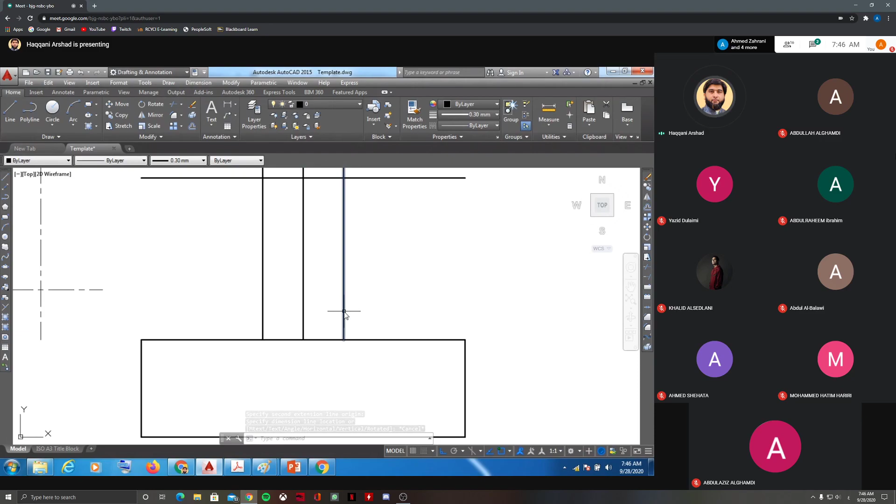So I will offset 10 from here on the right and here. Similarly, this one is on the left. Sorry, so this is actually a midpoint. I'll just remove it. So it will be like this. So I'm just going to connect this. This is construction, just simple construction using the dimensions.

So I'm just going to trim the lines. Okay, and also I'm going to trim like this. So it will be the L. Okay. Also you can remove this one. See this, something like this. So you have L's on both. So you got L. So this is 100.

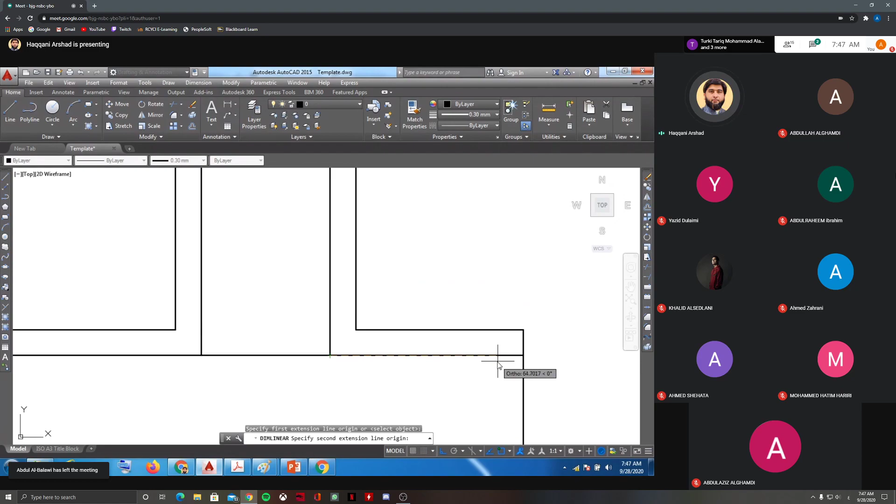If you want to check the dimension from here to here, it must be 100. Okay, and if you see, this distance will be 50 in between. Okay, and this is 75 from here to here, and the thickness from here to here is 10.

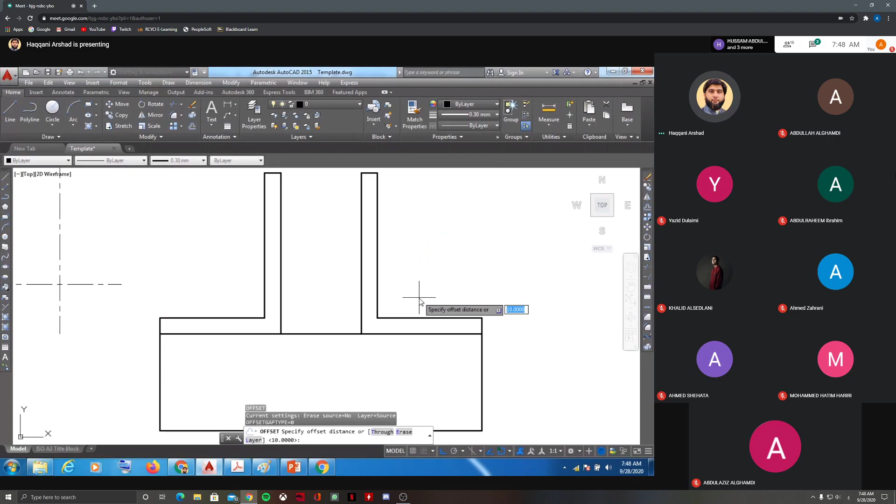Okay. Now I'm going to draw the bush here in the middle. This is the bush. That is the distance given here. If you see from here to here, it is 65 to get the center, and from the center we can take 32 up and down in order to get the bush. So I'll offset 65 from here. This is my center line, where I'm going to fix the stud. So this is my center line.

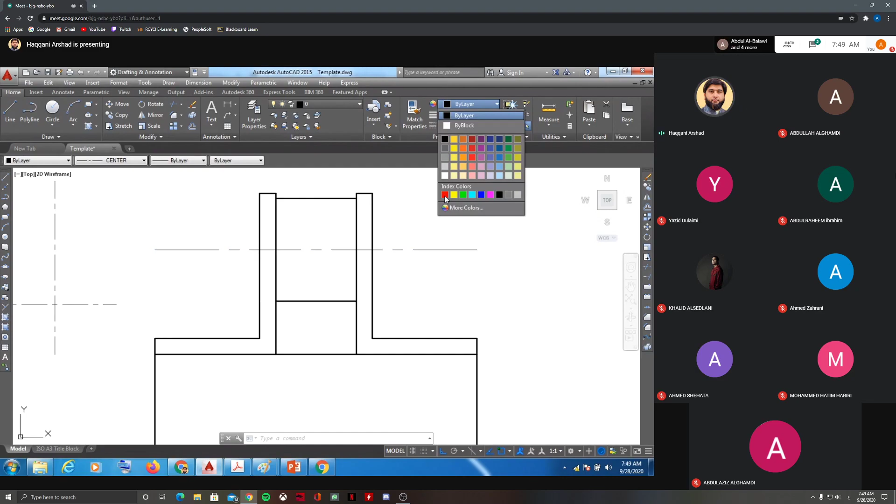Then I'm going to use 32. That is the dimension for the bush. So this will be my bush. Use color. Okay. Then I can trim these lines. You can see the figure and draw. You can just trim the lines so you can show that this is the bush. So this is actually a center line. I'll use some color for that. Okay, this is the center line for the stud.

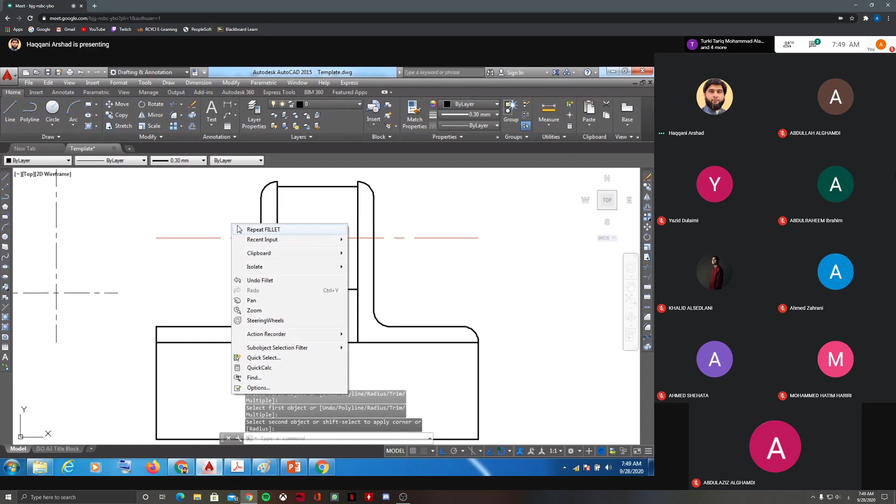Now we have to do the fillet, because if you see, there is a fillet radius R10. R10 is the radius. You know how to do the fillet; we already did it in MCET201. Go for fillet. R, you have to type R always. Enter. Then the radius is 10. So you can do the fillet. Repeat for all 3 edges of the L plates. Okay. Now we have done the fillets.

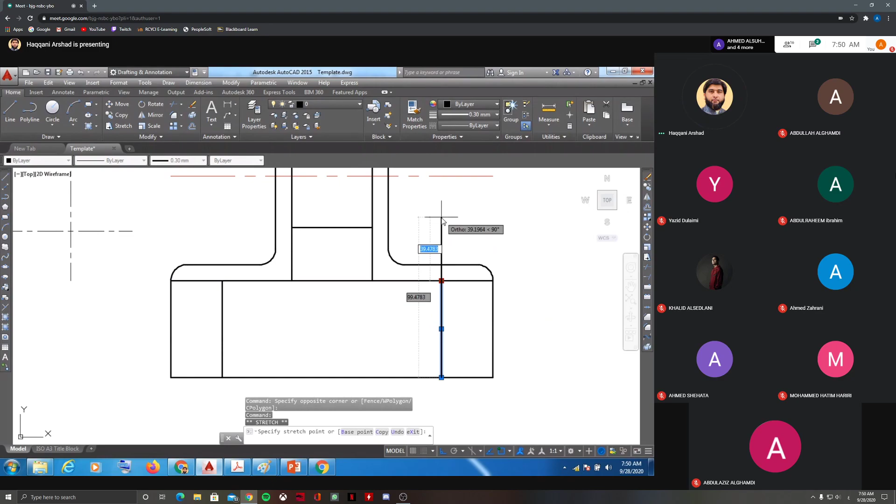Now we are going to take the center line for the cap screw as well. You can see the same distance. 32 is given on both sides, so we'll take 32 as well. You can offset 32 from here. 32 is also 32. Okay. This will be my center line for the cap screw. So I'm going to change it to a center line.

Okay. Now this will actually be a blind hole. It's not a through hole. Right. Okay. Now first we'll start with the stud. I'll show you the stud first.

M16 stud. Now, as I told you before, whenever we start any drawing, the size will be given, like M10, M20, M14, whatever. It means the capital D, that is the major diameter, will be given. So M16 is the size for the stud, and M14 is the size for the cap screw. We have two different sizes here. So capital D is 16 for the stud, and capital D is 14 for the cap screw.

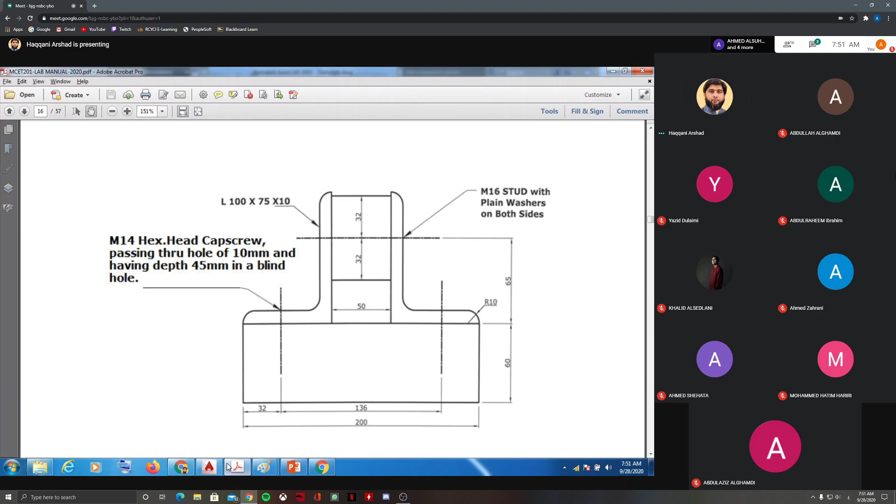So let us start with the cap screw. You need to calculate the dimensions using the formulas. Last week we used some formulas. If you go back to exercise 2.3: the width 1.5D to draw the hexagon, 2/3D, 7/8D, small d, that is 0.85D. The formulas will be constant.

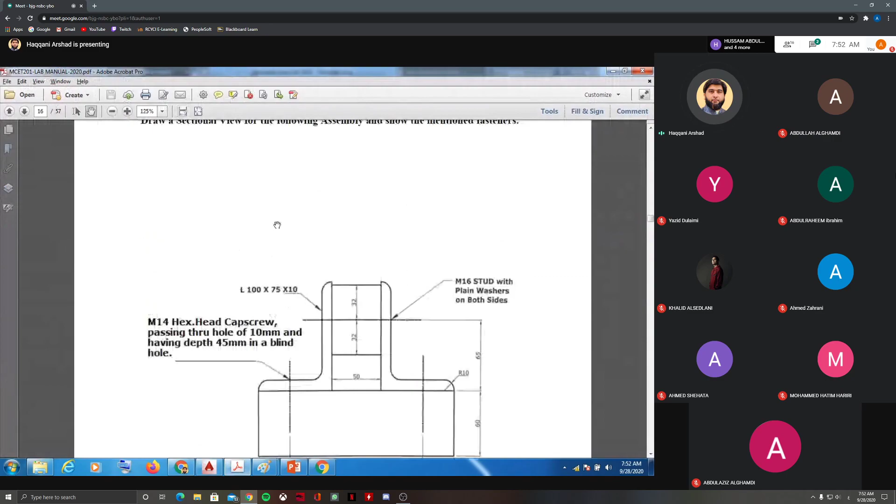Okay. Now remember one thing. Whenever we start any threaded fastener, whether it is a cap screw, a stud or a bolt and nut, we always start with the hexagon. This is actually the width, that is 1.5D. Whenever you want to draw a bolt and nut, a stud or a cap screw, you must start with the hexagon. And the rule for the hexagon is the same. If you go back to exercise 2.3, you see the rule 1.5D.

If you are drawing the bolt, the rule will be the same, and if you are using a nut, the rule will be 7/8 D. So you must remember these rules. Using these rules only, you are going to calculate and draw the dimensions, because only the capital D will be given. The other things you need to remember and calculate accordingly.

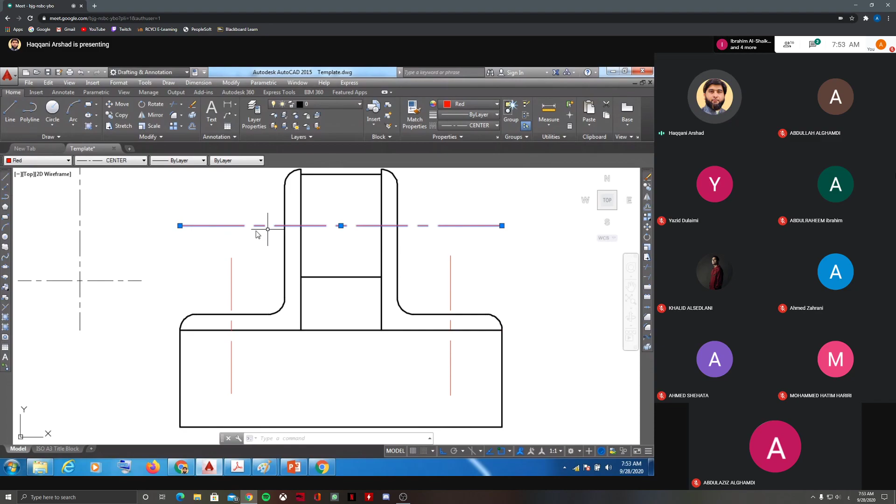Now I'm going to draw a stud here. I'm going to draw the hexagon first, then I will be able to project the lines to draw the nut. Here I'm going to use nuts because this is a stud, so I can only use a nut on both sides, one on the left and one on the right. It will be something similar to this one. If you go back to exercise 2.3, you see this one. This is threaded on one side. You have a nut. It will be similar to this, but it will be a mirror image.

So I'll start with the hexagon first. Let me just take one more line here. This is also my center line. I'm going to draw the hexagon. Same rule, number of sides 6. I'll start the center here. Now you know inscribed and circumscribed. We usually go for C, that is circumscribed. I have already shown you last week. Now you need to calculate first. It's asking me the radius, so use a calculator.

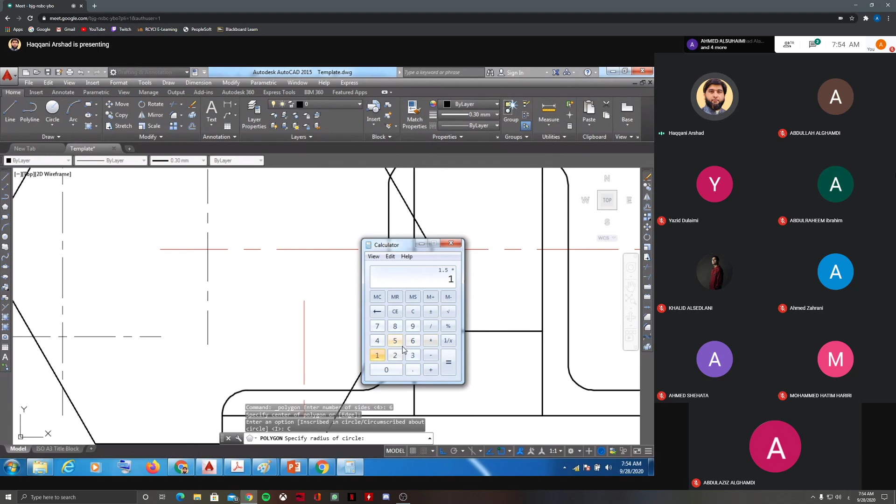Now what is the rule? The same rule, 1.5 D. The D here is 16. Remember, capital D is 16 for the stud. So wherever you are using capital D, it will be 16. So multiply by 16, it will be 24. So 24 is my width, but here it is asking me to specify the radius. I told you that whenever you use a radius, you must give half of the width. Don't give 24. 24 is the width, so you must give half of 24, that is 12.

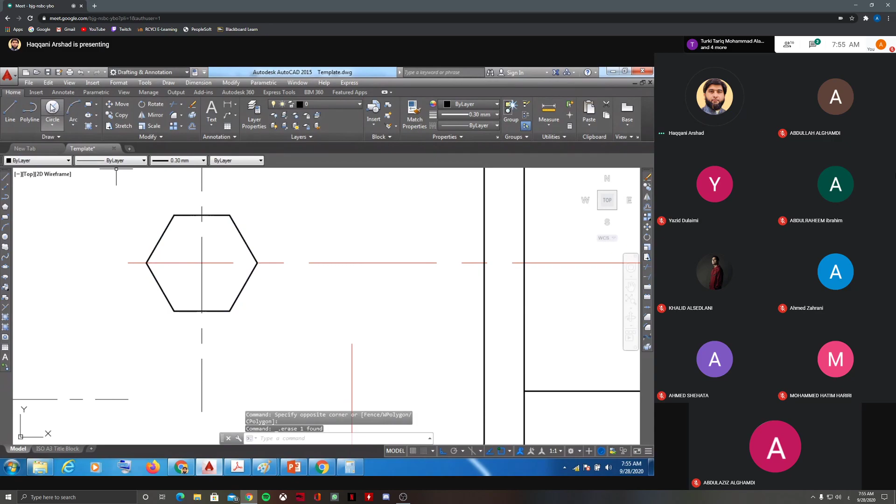If you have any doubt, you have an option to check the dimension. From here to here, it must be 24. This is according to the rule 1.5D: 1.5 multiplied by 16, that is 24. This is not the first time I'm drawing this; we did it in exercise 2.3. After that, you can draw the same circle using the same radius, 12.

But now, one thing is a change here. I'm not going to draw the stud vertically, because if you see the position of the stud, it is horizontal. So we need to rotate this, because you are fixing it horizontally. When you draw this hexagon, usually we project the lines like this, just like in exercise 2.3, to draw the bolt and nut. But we are not going to draw vertically, we are going to draw horizontally. So you must rotate this hexagon in order to project the lines horizontally.

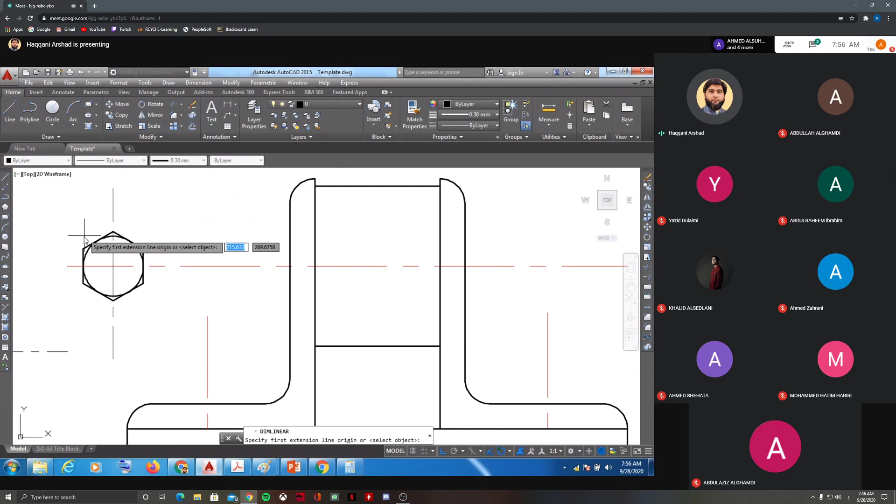So I'm going to rotate this one. Go for rotate from the center. Just type 90, so it will be rotated. When you check this dimension, this will be 24, that is the width of the hexagon. Now I will be able to project the lines. Simply I'll project the lines onto this body, because I'm going to project the 4 lines. Same. Okay.

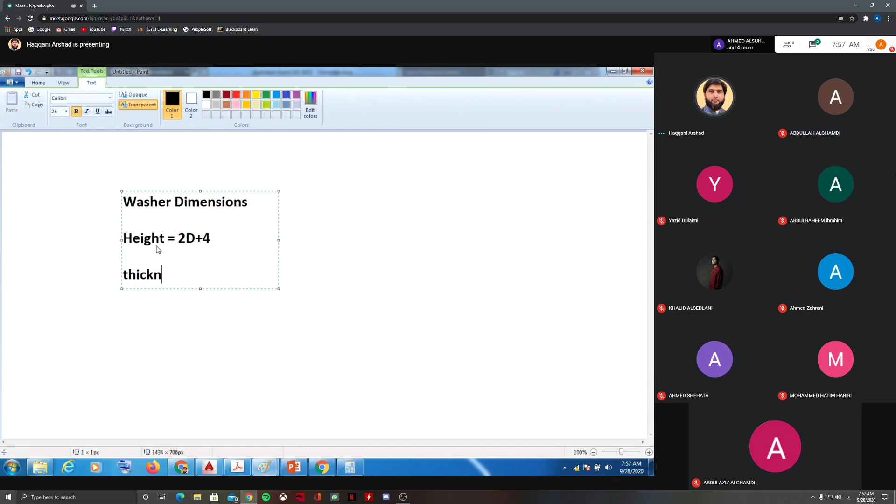Now I can fix the nut here. But before I fix the nut, as per the question, they asked us to fix the washer. I'll fix the washer and then I'll fix the nut. Now remember the washer dimensions I will give you. Just make a note of the washer dimensions. The total distance, or you can say the height, is 2D plus 4, and the thickness will be 0.15D.

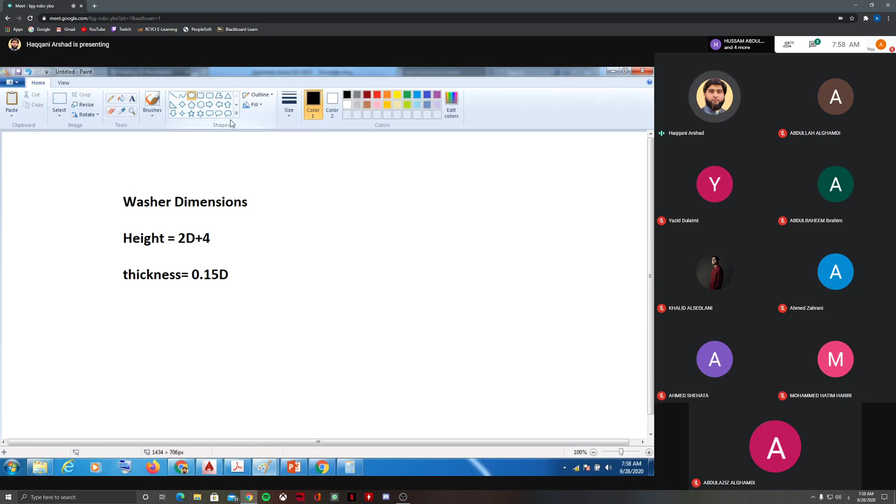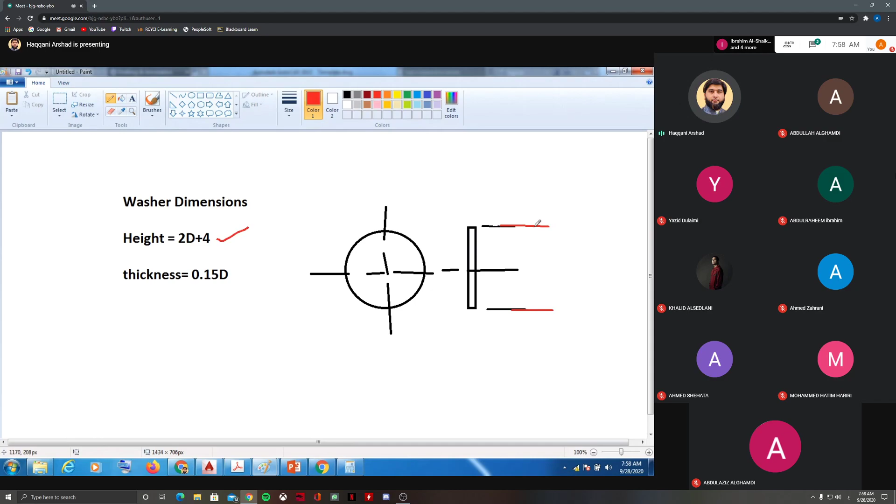For example, if you have a washer like this, if you see the side view of the washer, it will be something like this. Now let us say this is a center line. Here the dimension from here to here is 2D plus 4, the height. The total length of the washer will be 2D plus 4. D, you know, is the given D, that is the major diameter.

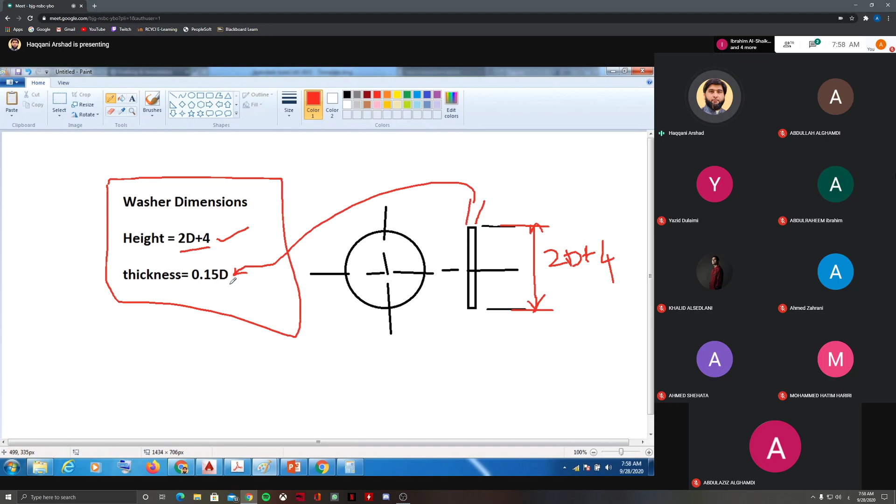And this is the thickness. The thickness will be 0.15D. So you have to make this note as well, that for the washer 2D plus 4 will be the height, and 0.15D will be the thickness. I can fix the nut here, but before the nut, I need to fix the washer to the L angle, then I will fix the nut. So I will take the dimensions for the washer first.

So what is the thickness? It is 0.15D. So I'll take the thickness first: 0.15 multiplied by D, which is 16, gives 2.4. So I can offset 2.4 from here. So I've got the thickness, and I need the length as well. What is the length formula? That is 2D plus 4: 2 multiplied by 16 plus 4, that is 36. 36 means I can offset 18 from the center. Then simply trim these lines.

Right, now you can clean this area.

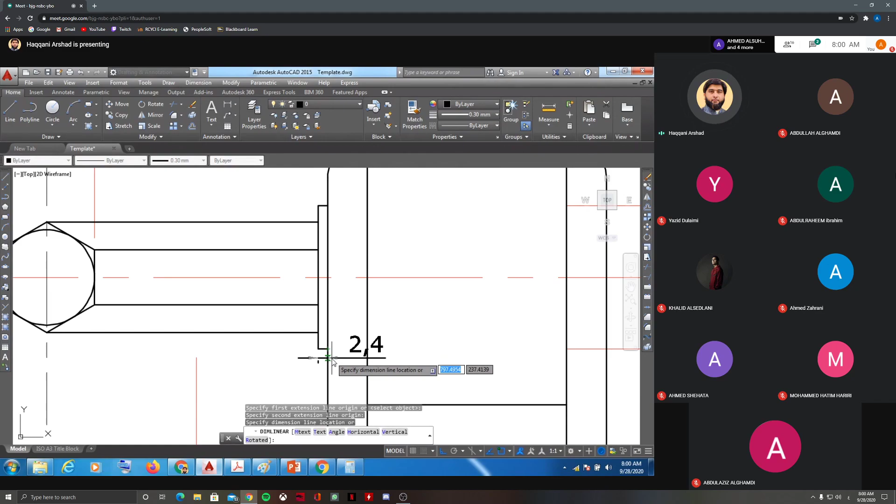Now above this washer, I am going to fix the nut. What is the formula for nut? As per the previous exercise, you see the thickness of the washer is 7 by 8d. If you go to the exercise, you see here, this thickness of the washer, 7 by 8D.

So sorry, the nut, the thickness of the nut is 7 by 8D. So we are going to use the same thing. 7 by 8D, use the same formula, 7 by 8 multiply the D is 16. 14 is my thickness of the nut.

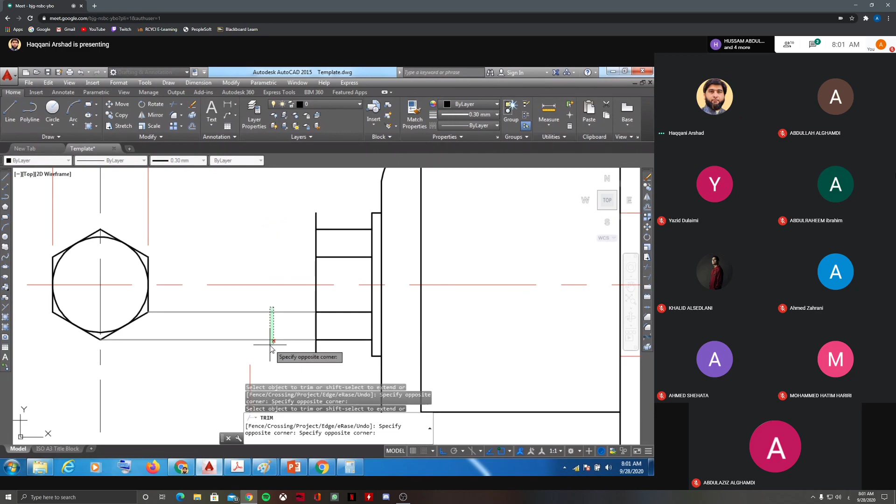So I will offset 14 from here outside, above the washer. Not from here, already you have the washer here, so you must offset from here. So you have this thickness you got for the nut.

Now always whenever you say nut, it will be something like this. Always remember, whenever you say nut, this one, it will be something. Because when you fix a nut, there will be a nut end. Always there will be a nut end. So it will be similar to that.

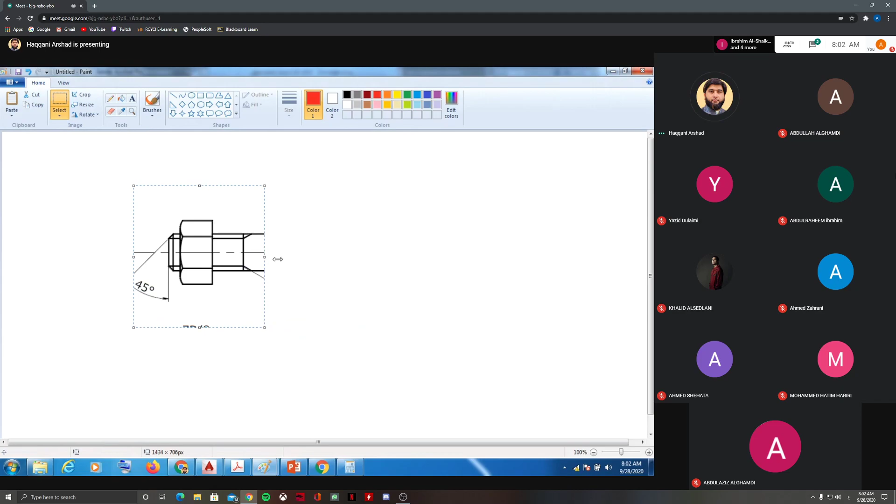I'll just show you an example. Yeah, something like this, it will be similar to this one. So whenever you fix a nut, there is a nut end to this. Then only it will be the representation of the nut.

So now the next thing is to draw the arcs. As you know, whenever you draw a bolt or a nut or a cap screw, you must have the arcs. So we are using the same method as in 2.3. I have shown you how you're going to use it. So from the end of the circle, not from the end of the hexagon, from the end of the circle, we are going to project a line.

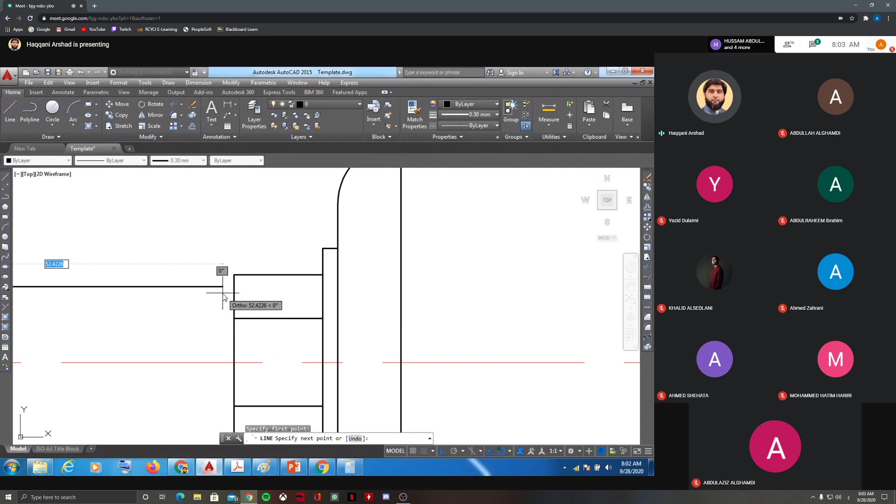Same, wherever it is touching the head, we are going to take a 30 degree angle. Means this angle, this should be 30 degrees. So it should be how much? It should be 60, if I say 60, this will be 30.

If you go back to the previous exercise, see, I'm using the same method. It should be 30 degrees. Later on, you can mirror it on the other hand, then you can connect this second line. And then you're going to use a 3-point arc.

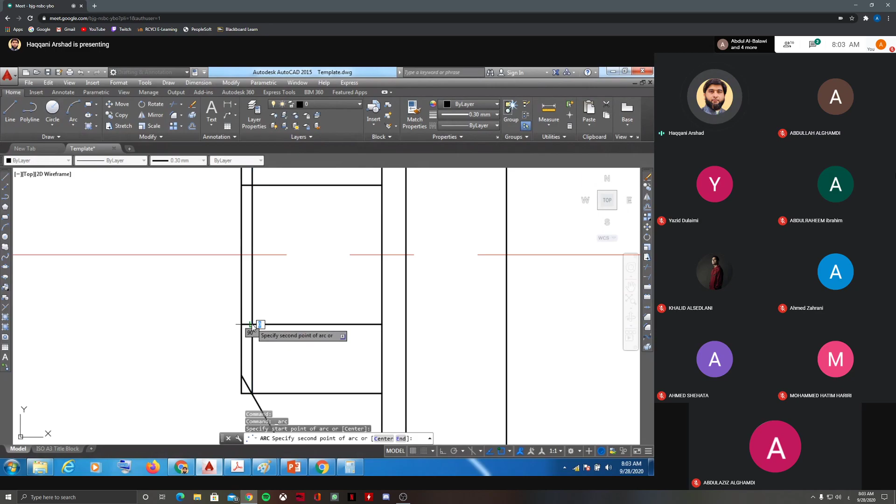Same method, it's not a new method I'm doing. We have done this in exercise 2.3. Similarly, we are going to use on the left and right the same arcs.

Use 3-point arc from here, take the midpoint. Also here. After that, you can just simply remove this line and then trim the edges.

Now you got the arcs, but this nut is not complete without the end. So it must have an end like this. As I told you, we usually offset 5 to draw this nut end.

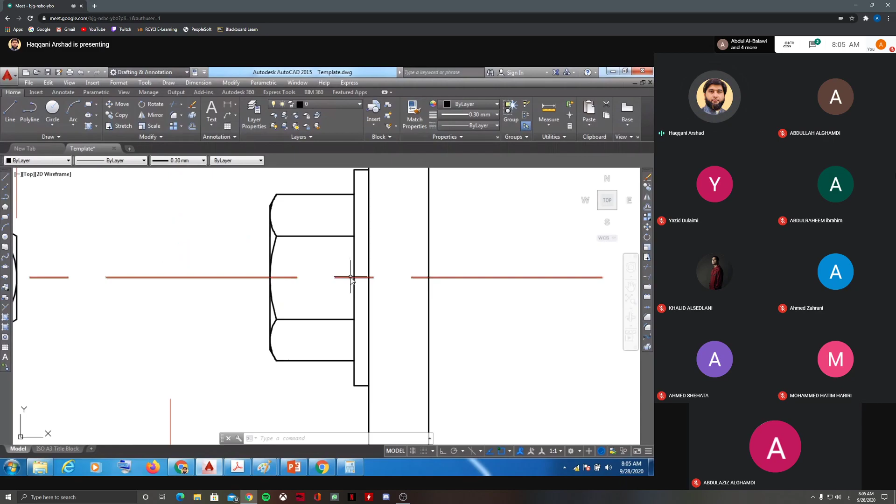But in order to draw this, you must have the capital D and as well as the small d. So now we are going to take the capital D and small d with the angles, the same method. Let me just take offset 5 from the nut end.

Now I'll take capital D, small d from the center. The D is 16, small d has the formula, that is 0.85 D. So D is 16, so you can offset 8 up and down. This will be capital D, that is the major diameter.

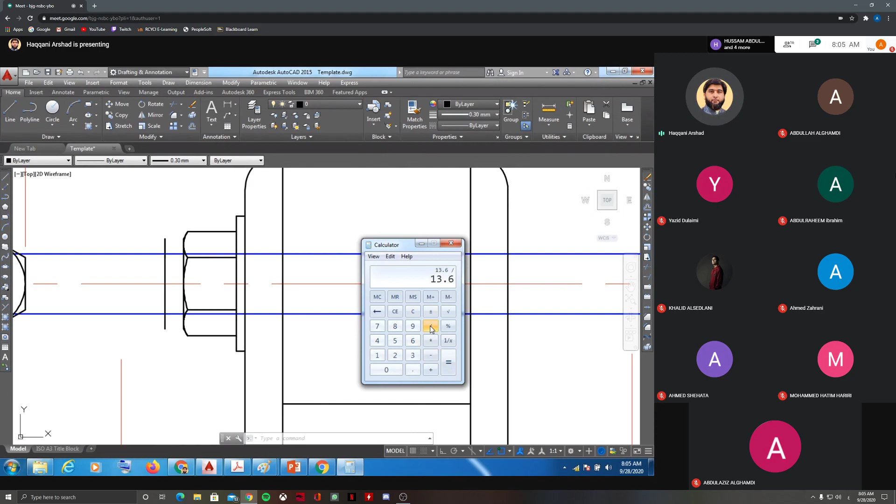Then I will take the small d as well. What is the formula for small d? 0.85 multiply D, 16, that is 13.6. 13.6 means I can offset 6.8 from the center.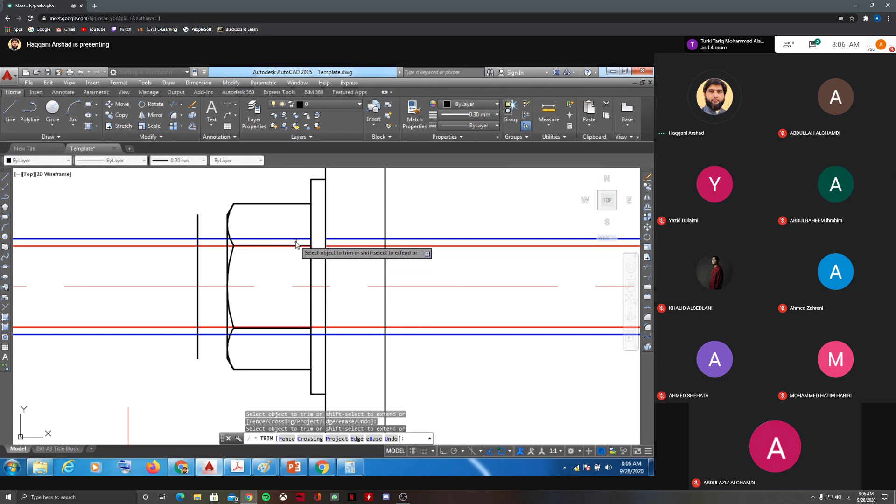Now I have this capital D and small d. And as I told you before, whenever you have this capital D and small d, it should not come inside the bolt, it should not come inside the nut. So we are going to clean up, you just need to trim it. Like you see, it's coming inside the washer, it's coming inside the bolt, so I'll just trim the lines.

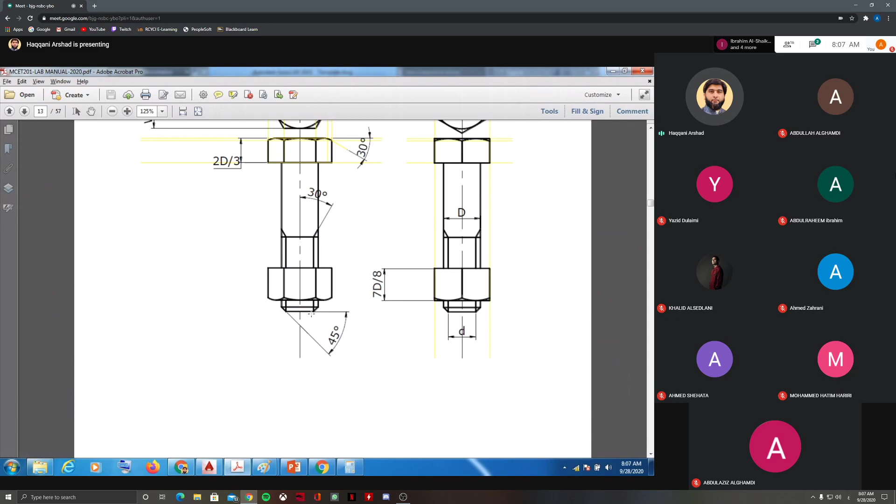Okay, now the final thing is the angles. As I told you, one side will be 45 degrees, the other side will be thread run out, that is thread 30 degrees with the center line. Like here, see one side 45 degrees and other side thread run out using capital D and small d. So we are going to draw the angles. You see this one.

Using small d, take 45 degrees angle, joining the capital D and small d. Same thing, I can project it. You can mirror the same thing on the other side and trim it. Like this, so you got the 45 degrees chamfer, the same thing.

And the other side will do thread run out. Thread run out means this angle with the center line. Always it should be linked with the center line. It is linked reference to the center line. It should be 30 degrees. So I directly will take 30.

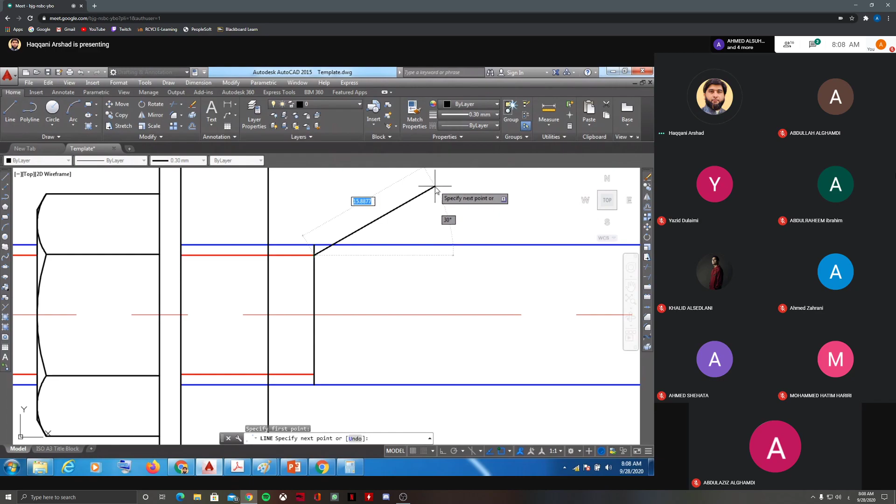You can see if you want to see the dimension. This line with the center line, it must be 30 degrees. So I can just mirror it on the other side.

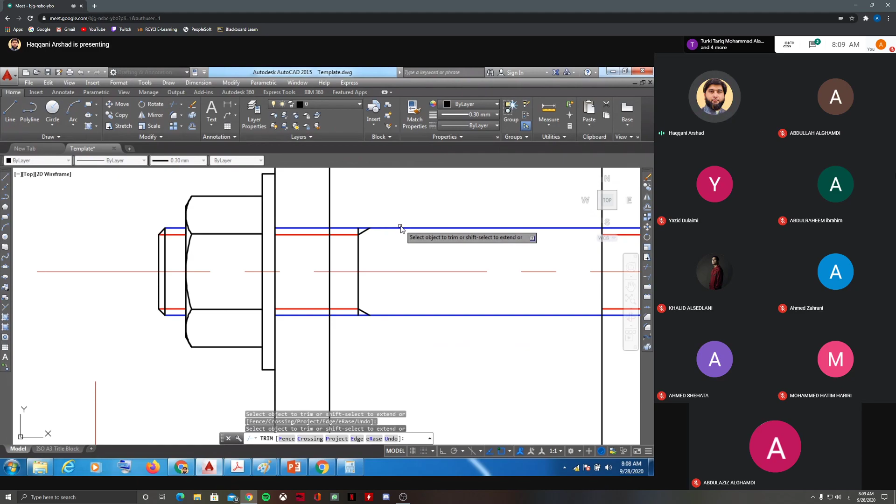So your nut is ready with the washer. The only thing here, there is one problem here. Whenever, because this is a sectional view, we are going to show in a section view, this line is actually the line joining this part and this part. So this line, which is the joining line for these two parts, the partition line, should not come inside the hole. Means in sectional view, the hole should be clean.

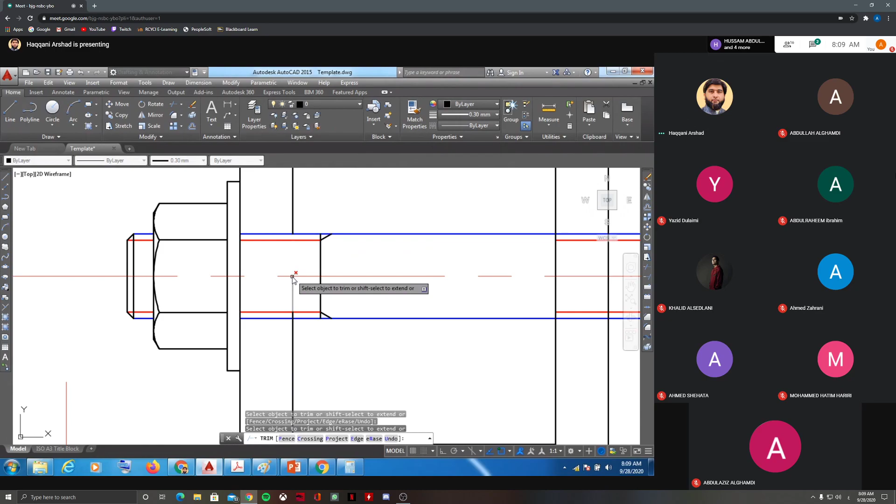Only you must have a capital D and small d. You should not have any other lines. So this is coming inside. So it is really important to trim this line. See, I'm going to trim this because it is coming inside the hole. So always remember, it should be like this.

The other side will be same because as I told you, stud is threaded on both sides. You have threads on both sides. So you're going to use another nut on the right side. So no need to draw because you're going to draw the same washer and nut on the other side, on the right side. So what I will do is simply I will mirror it because I have the same thing on the other side. So I'll simply remove all these lines.

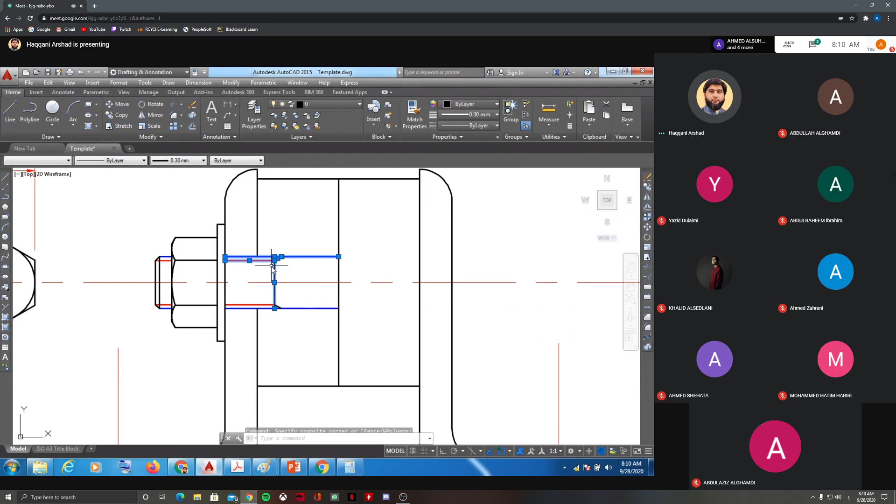You can save your time. Simply you can save your time. So what you do, simply select everything, the capital D, small d, select the nut, select the washer, okay, copy, make sure that every line, every angle, the arc is selected, and you can simply mirror it on the other side. Okay, because it's an opposite side, so you need to mirror, you cannot copy.

See, that's it. And this line which is coming inside the hole, I need to trim this. See, you got the stud because stud is threaded on both sides. It will be a mirror image, it will be same on both sides. So because it's a through hole, so you will have two nuts, one on the left and one on the right. I hope you understood this construction of a stud, washer, joining these three parts.

Okay, after that we'll do the hatch, but we'll not do hatching now. We'll finish the cap screw and then at the end we do the hatch. Okay, now let us come to the cap screw. Now here we are going to draw the cap screw.

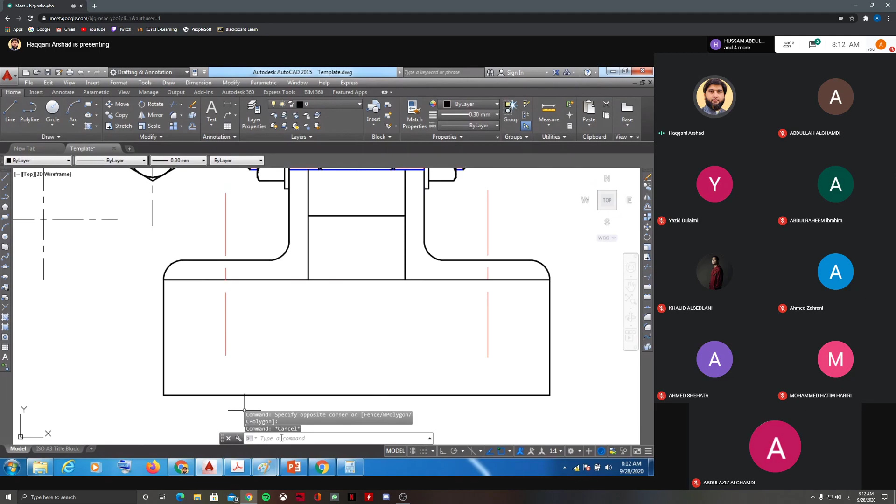Now I'm going to draw the cap screw here. Same, I will start with the hexagon here. But if you see this, the cap screw is vertical, not horizontal. So we are going to draw the hexagon, and then we are going to draw the construction of the cap screw in a blind hole. Okay, but here there is slightly a difference. If you see a cap screw, I'll just show you the construction of a cap screw. No, I'll just take this. Okay.

The construction of the cap screw. We are going to draw with the hexagon, starting with the hexagon as usual, using the same formula, 1.5D. We are going to project it, and then we are going to draw.

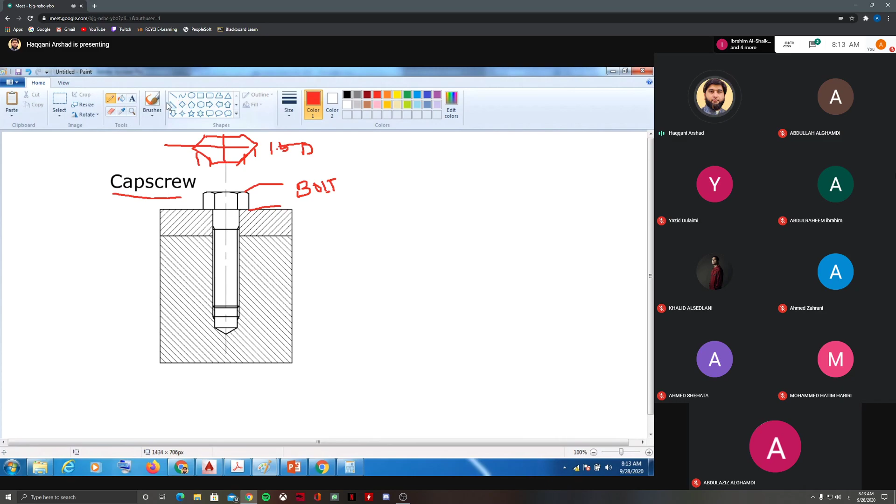This thickness, the head of the cap screw, will be similar to bolt, because I told you cap screw is also called bolt. So we are going to use the same dimension, the same thickness for the bolt. What is the thickness of the bolt? 2 by 3D. I hope you remember from last week. We are going to use the same method, 2 divided by 3 multiplied by the given D, for cap screw, because cap screw is similar to bolt.

But nut is 7 by 8D. Don't get confused between bolt and nut. Nut is 7 by 8D. That is a different thing.

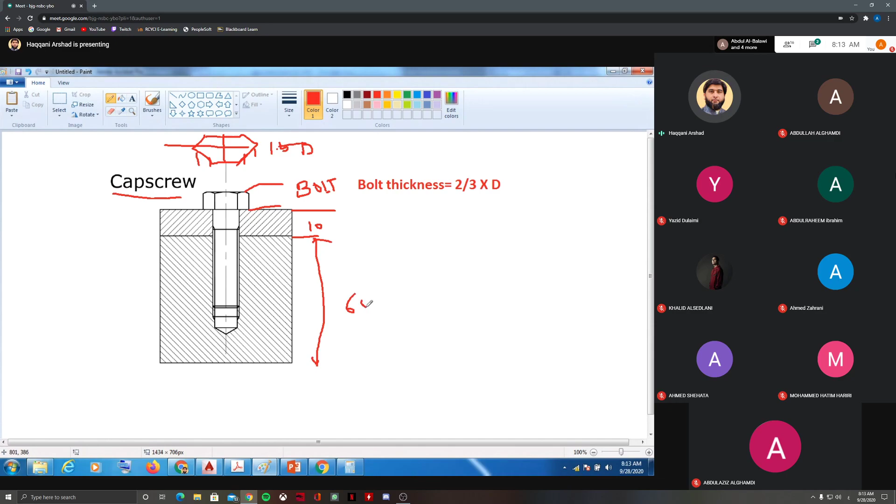Now from the figure, this is 10, and this is 60 from here to here, which is the base actually. From the figure, I'm just showing you an example. Now the depth is given in the figure, that is 45. So we are going to take the depth from here to here, which is given in the question. They say 45 is the depth.

Now here we have two more angles added. One angle is the drill angle - if you see the V, something like this is called drill angle. Then we have a tapping angle, and then this is actually the 45 degrees for the cap screw itself, and this is the thread run out.

So only these two angles are new. Already you know this is a thread angle, thread run out, that is 30 degrees with the central line. This is 45 degrees angle - you already know that whenever you have end of the threads, you have 45 degrees. Only this angle, the tapping angle, is added here.

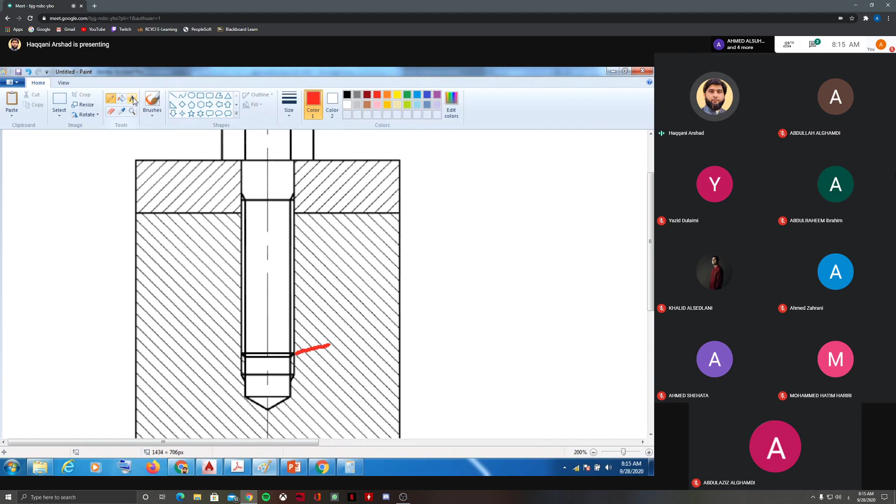So let me just go back and zoom in. Now, as I was telling, only this is the angle, that is 45 degrees, common.

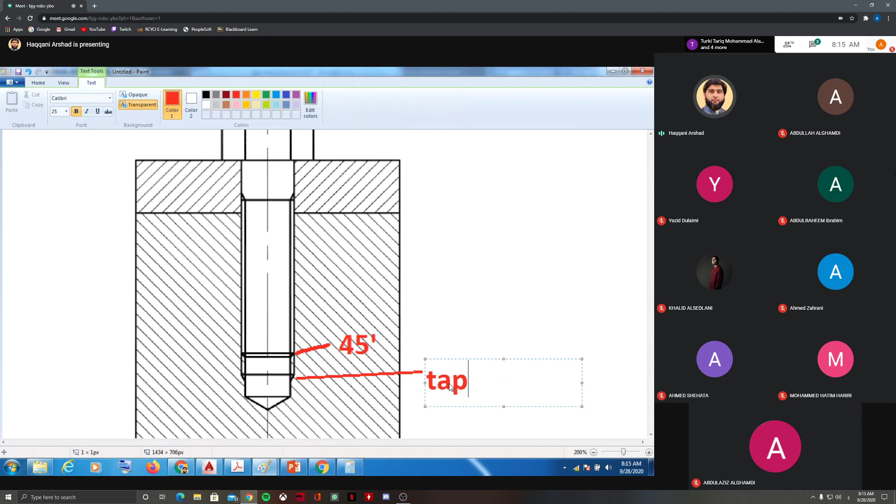We have one more angle, this one, which we call tapping, or you can say this is for the threads actually. It's similar to thread run out. This angle with the center line will be 30 degrees, thread run out.

The last one is the drill angle. When you take the depth and make the drill, this will be 120 degrees included angle, the angle included in the V will be 120 degrees. Means something like this - say this is the V. So this angle should be 120 degrees included angle.

So only two angles are added here: 30 degrees with the center line, the thread run out or tapping angle, and the drill angle. The remaining - this is 45 degrees for the cap screw, and this is thread run out for the cap screw.

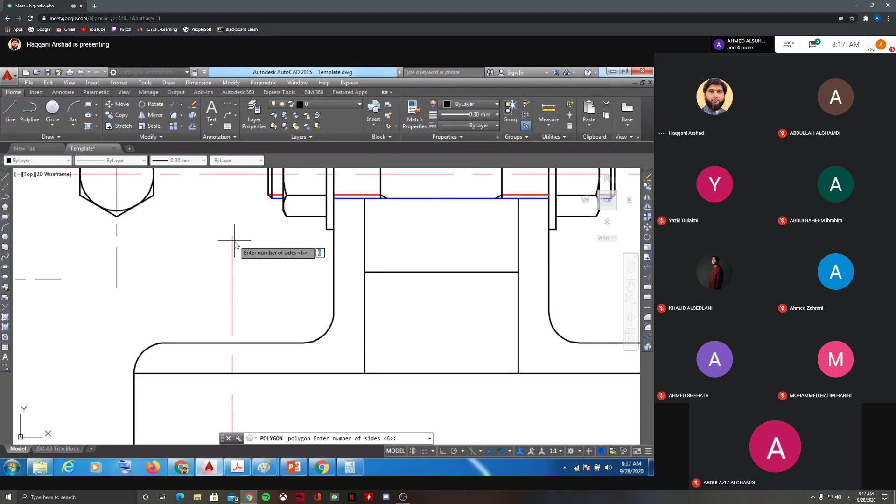Now I'm going to start with the hexagon first. Number of sides, 6, same C, 1.5D. D is 14 here - remember, not 16, okay, M14 is for cap screw. So I'll use the same formula, 1.5D, that is 14. 21 is my width of the hexagon. So how much should be the radius? Should be half, right? Half means 10.5.

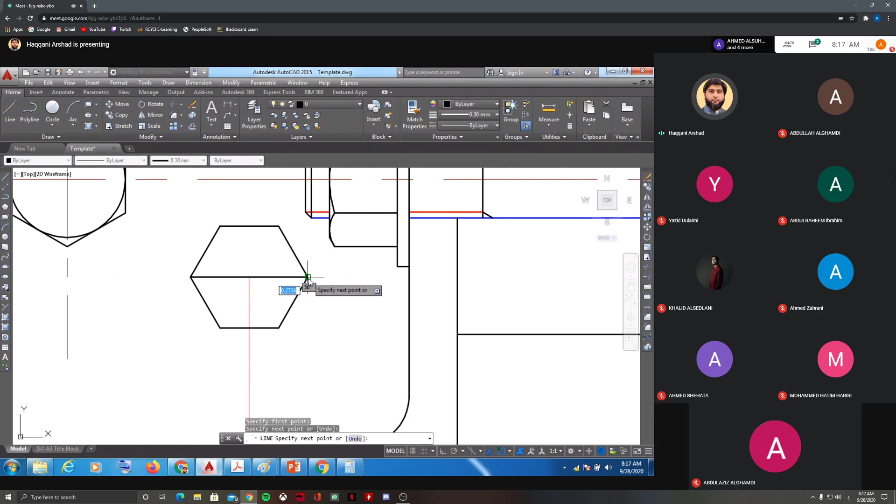So if you want, please check the dimension. Whenever you draw the hexagon, please check the dimension - as per the rule 1.5D, it must be correct. Otherwise, if your hexagon is wrong, then the entire projections will be wrong. So make sure you have the hexagon dimension correct. So I will use the same radius, same method, and we are going to project.

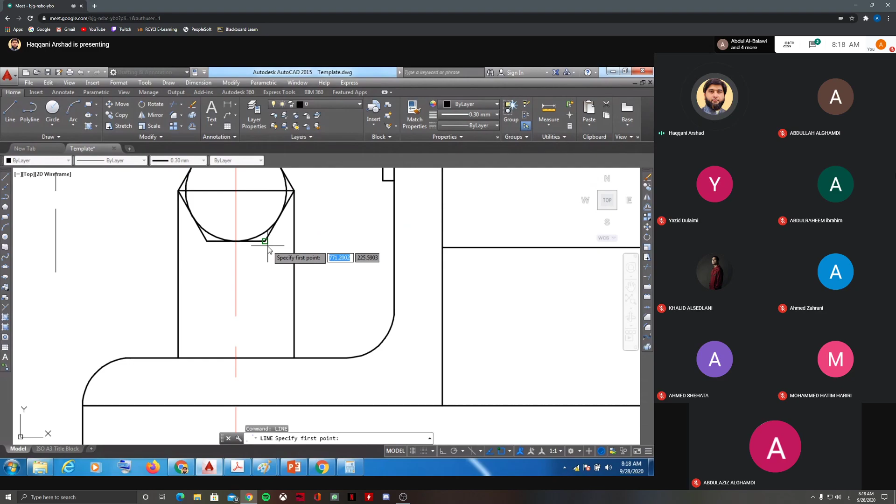There is no need of washer here, because it is not mentioned, so I'm not going to use a washer. Only if it is mentioned, you use it, otherwise no need. So I'm going to drop the lines in order to draw the cap screw head, which is similar to bolt.

I'm going to use the same thickness, that is 2 by 3D. Remember, the thickness of the cap screw and the thickness of the bolt are the same - it's also called bolt, similar to bolt. We use cap screw in a blind hole where there is no space for nut, where there is no through hole - it's a blind threaded hole. So use the same rule, 2 by 3D, that is 14. 14 is the size, so 9.33.

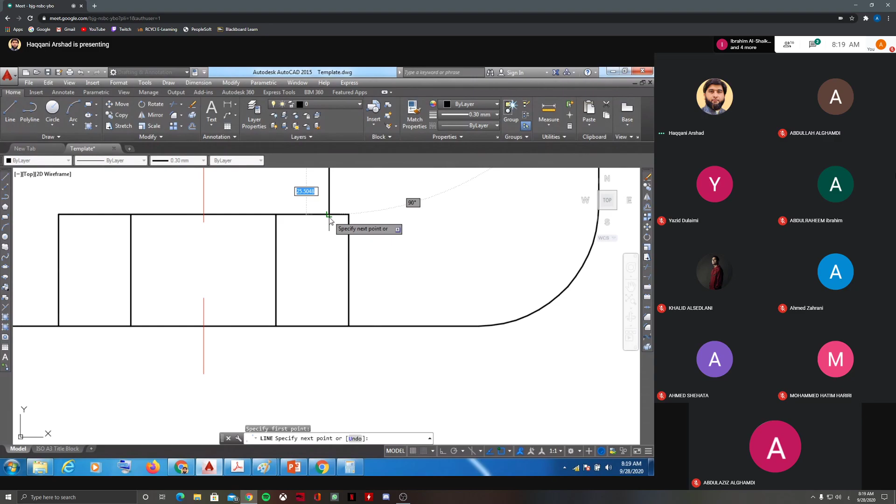So you can offset 9.33 from here, and you got the head of the cap screw, that is 2 by 3. Then you are going to draw the arcs, the same method we did for bolt and nut. Then you have to take the angle, that is 30 degrees, like this. Then mirror it, then take another line.

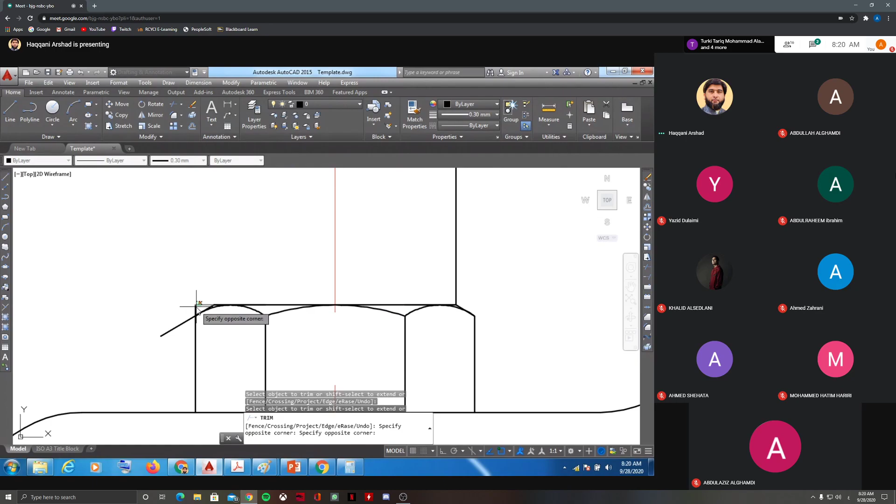Then use arcs, 3-point arc, in order to draw the arcs for the cap screw. Okay. Then you delete this line and trim the edges. Okay, so you got the bolt. Okay, that is cap screw, head of the cap screw.

Now we are going to draw the other side, this capital D, small d, and the angles. Now, as per the question, they have given 45 as a depth. So this 45 will be from this base only, because where you are going to drill, you are going to do it in the base. The base has more thickness. That's the reason we are going to fix the cap screw into the base. You are going to fix the L to the base.

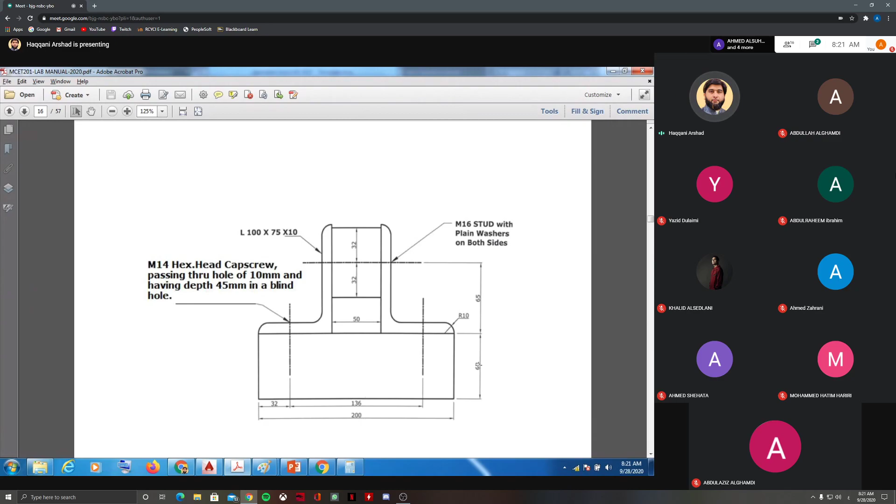So L already has a through hole, but this 45 mm is a blind hole, so from here to here it should be 45. Means out of 60 it will be 45. So I'm going to take 45, that is the depth for making the hole from here, not from the top, because already from here to here it is given 10. So we are going to use depth from here inside the base. Okay, you know the base.

So you take 45 from here, okay, like this. So this is 45 from here to here. So that is the depth. So if you want, I will show you from here to here. I have taken depth from here, not from the top, because it should be inside the base.

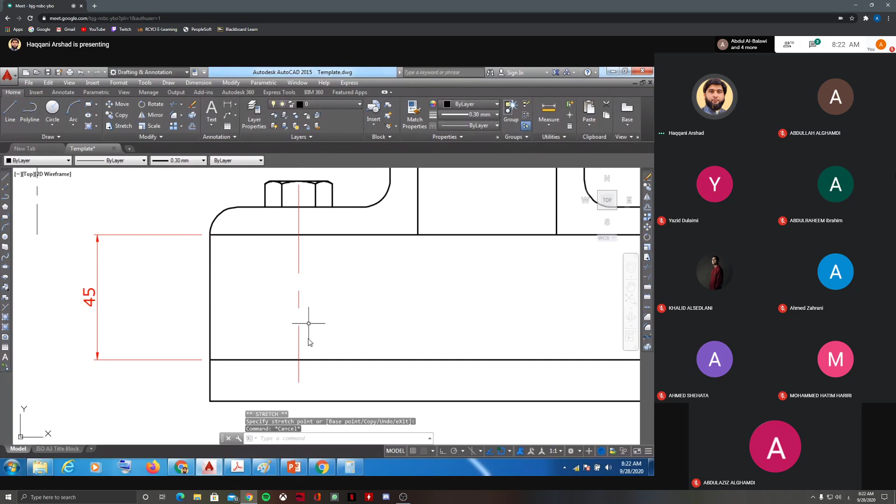Okay. Now I'm going to draw the capital D and small d, and then the angles. I'll show you how you're going to draw the drill angle, then tapping angle. First, I will take the capital D and then small d. Capital D, you know 14, so you can offset 7 on both sides from the center. This is the capital D.

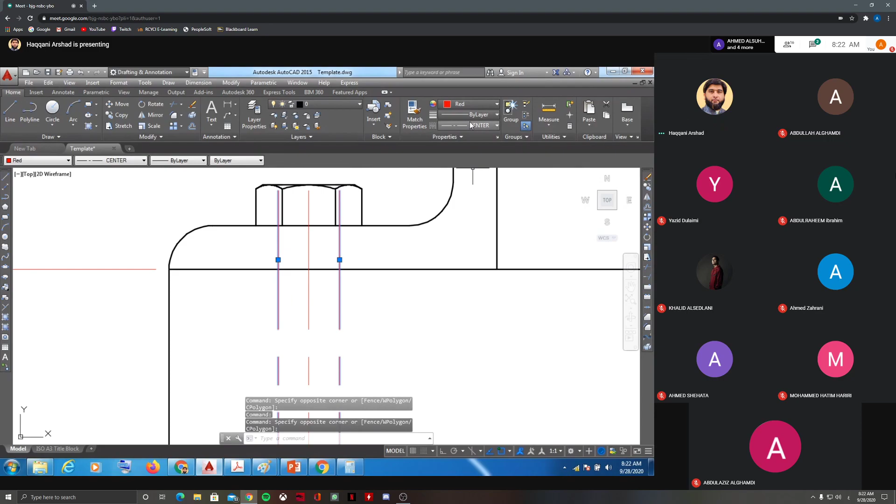Okay. Similarly, small d, I will take it. You know the formula for small d, 0.85 multiply 14. Okay. 11.9 is my small d. So I can offset half of it. 5.95 is the half. So this is my small d. All right. Now I got the capital D and small d. Now here I will just trim this because this is the depth. I got it from here. Okay.

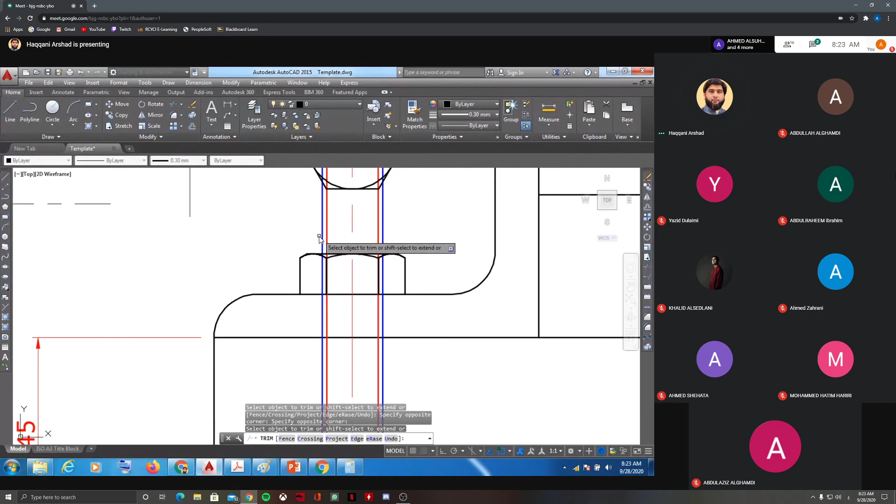Now, as I told you, here we have three angles. One is 45 degrees, one is thread run out, and then drill angle. If you see this, this is three angles: 1, 2, and 3. There is no specific distance between them. We will usually assume 5, 5 like this. So one side we can do 45 degrees. This is thread run out, and this is the drill angle, that is 120 degrees like this. So you'll see the construction here.

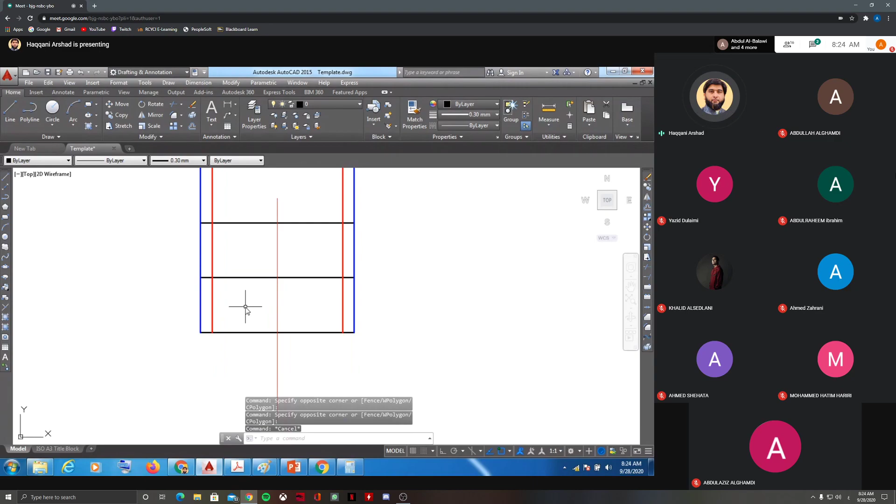So I'll just offset 5 and then 5. Why I'm taking this: here I can do the drill angle, that is the V. Here I can take the tapping, that is thread run out for the threads, and this is for the 45 degrees for the cap screw. So if you see this, it will be like this. We'll remove this one because the drill angle will be from small d.

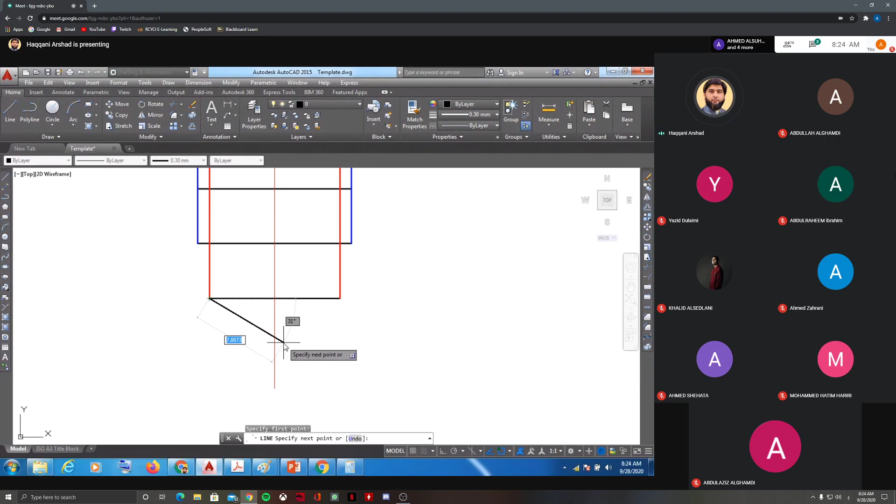First I will draw the drill angle, that is 120 degrees between the V, that is the included angle. So I'll take something like this. You take 30. You can mirror it and see the angle. See, this angle should be 120 degrees. What I did is I have taken 60 on both sides, so it will be 120 like this. Okay, so just trim it. Remember, the drill will be from small d.

Okay, then another angle, that is for the tapping. The tapping will be similar to thread run out. Thread run out means this line with this center line should be 30 degrees. So how much I have to take? I have to take this 60, so it will be 30 here. So take 60 angular. You can see from this angle to the center line, it must be 30 degrees. The same thing I'm going to mirror on the other side.

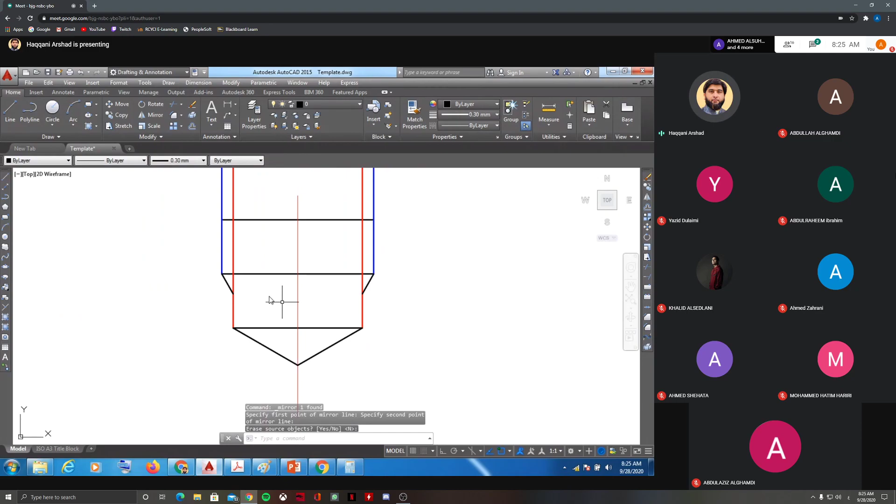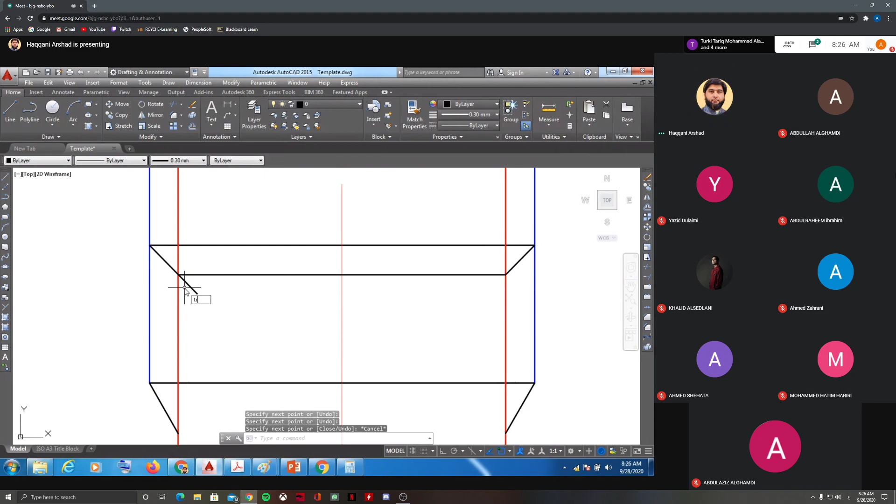Okay. Now these are the two angles which are new. The other one you know already, that is 45 degrees, chamfer between capital D and small d. 45. Now you got the 3 angles. Then moving on to the top side here, we need a thread run out for the cap screw now. Here we need one thread. Usually we assume the dimension somewhere here. The thread length, you can assume it. As I told you, we'll just assume a thread length.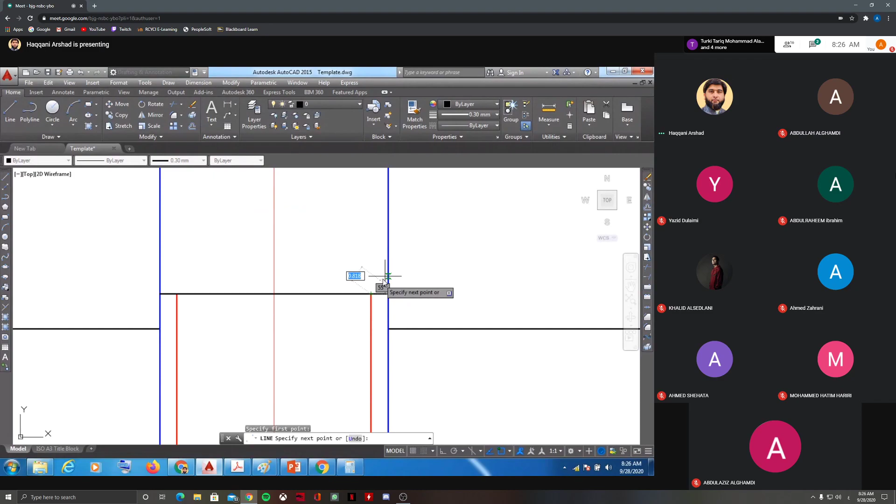And remember this line which is joining the two parts, it should not come inside the hole. So we will trim this line, the partition line. Okay. Then I will delete all this capital D, small d, which is coming inside the bolt. You must remove all these lines. Okay. Now I'll draw the thread run out again. The same thing, 30 degrees with the center line.

This I will mirror it. Okay. We got the thread run out here for the cap screw, and we have angles down here. Now this is done. Now we need the same thing on the other side. So you just copy it because no need to draw. You can save your time.

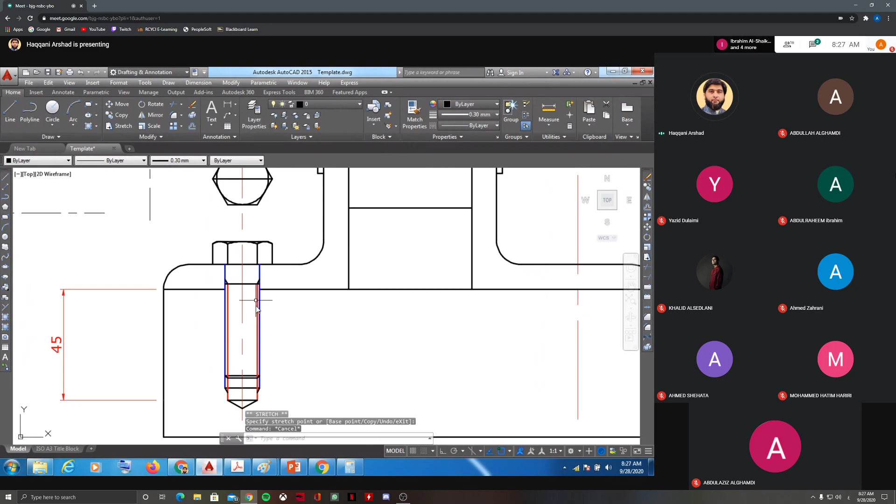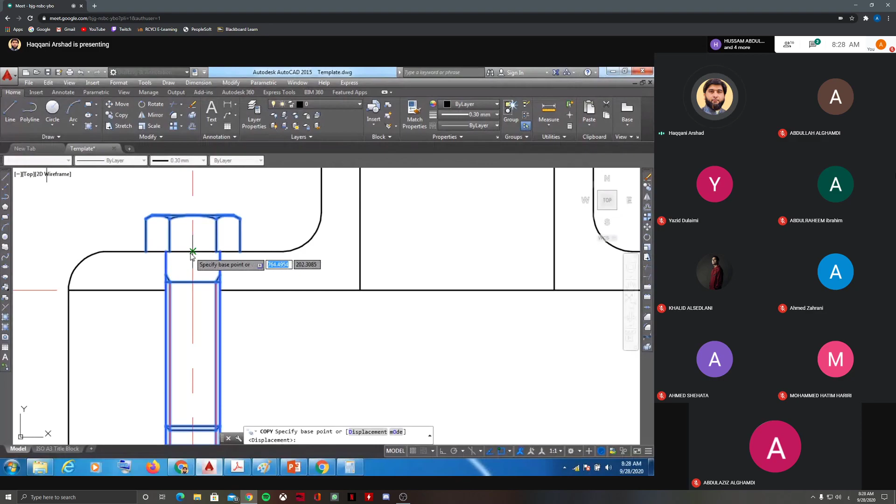Okay. So simply what I'll do is I'll just take the same center line. I'll copy everything. Cap screw. Make sure everything is selected. Angles, everything. And then you can go for copy from this point to the same center here on the right side. Okay, you got two cap screws.

Now here you just trim this line which is coming, this partition line. Remember this one, whenever you are showing hatching, you must remove this one. Okay. Now your figure is complete. The final thing, the last thing is the hatch, that is sectioning. This is really important. Now I'm going to show you how you're going to do the sectioning.

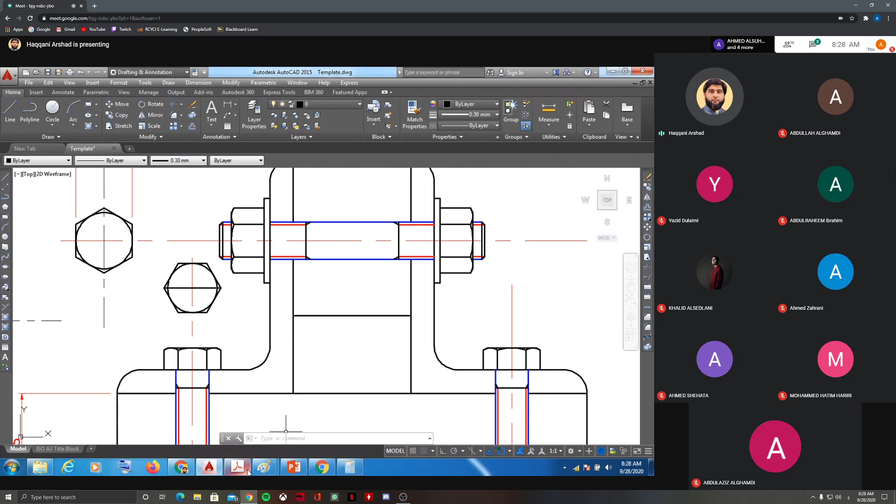Remember, whenever you have a sectioning, like if you have 2 parts and 3 parts, you must change the angle of hatch. For example, if you see this drawing, the hatch for this part and this part is completely different. That is actually the identification that this is another part, like part A and part B. You see the angle of hatch is completely opposite.

So you must remember, whenever you have an assembly of 2 parts or 3 parts, when you are doing sectioning, you must have opposite line of hatch. I'll show you. That is really important. That is the meaning that this is a different part. For example, I'm going to use hatch. Okay. Always use this hatch, whether it is ANSI31.

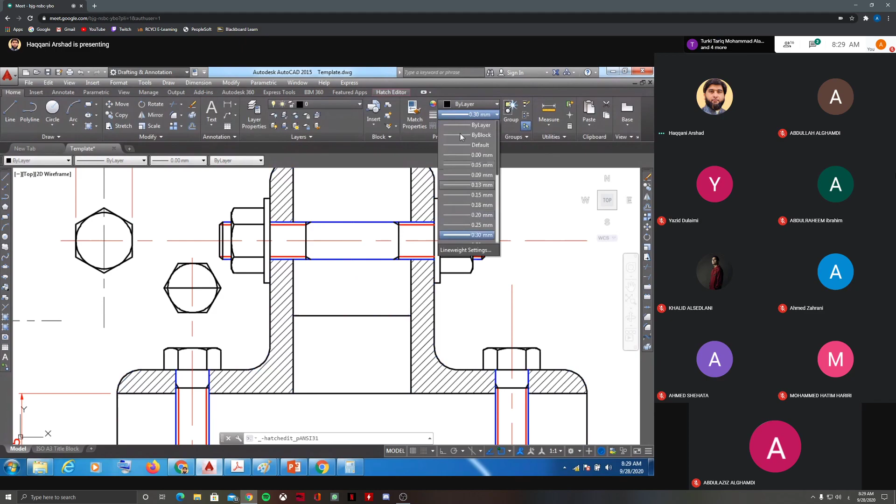Okay. Now I'm going to use hatch here. See? It is quite big. So maybe I'll use scale. I'll reduce the scale to 0.7. Okay. Now you see I did the hatch for this part. Now I need to do hatch for the bush as well here.

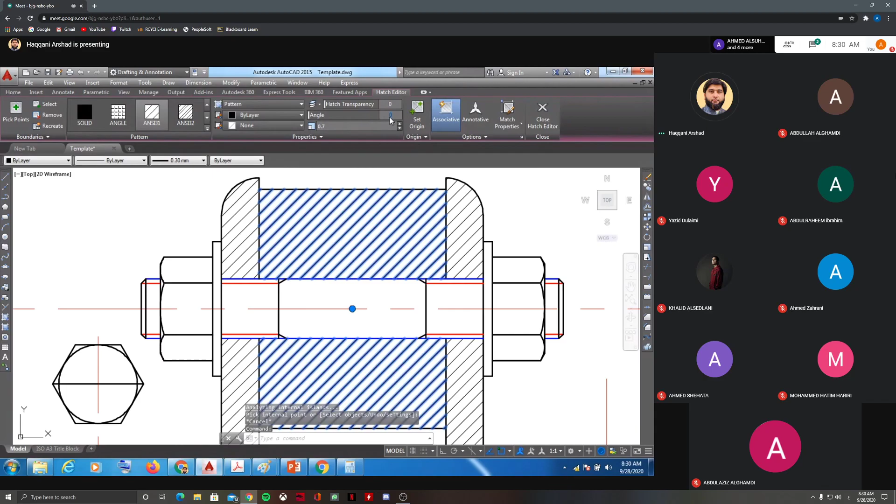This is part. There is a bush here. So you must have opposite line. Then only you will be able to identify that this is different and this is different. So go for hatch. And when you do this hatch, it must be opposite of this. So I will do it first and select this. Go for angle. There is an angle. I'll just change to some other angle, 90 degrees.

So you see the line is changed. It must be opposite to each other whenever you have 2 parts. That's how you identify between 2 parts. This is part A and part B, like that. Similarly, we need to hatch here for the base. Now you must have opposite hatch with respect to this.

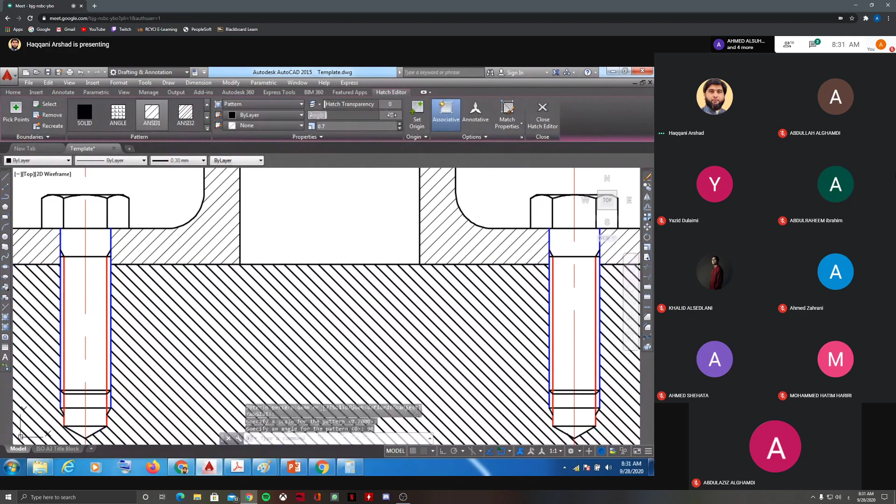So I will go for hatch, but you must change the angle. Also, I'll reduce this to 0.5. Just want to show you a very important point here.

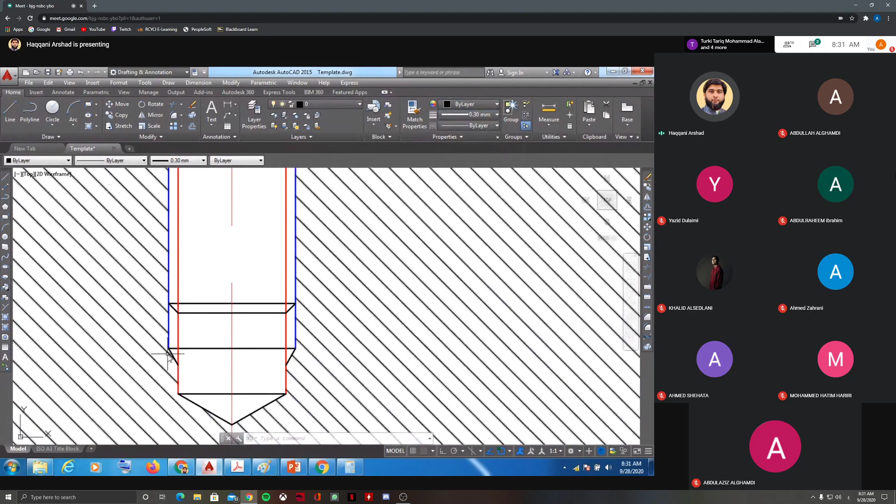Now, always when you do the hatch for a blind threaded hole, like in a stud, see this area is for threaded. As I told you, wherever you see this one, you must hatch here as well. After hatching this, you must hatch the blind threaded hole because this is the representation. So you go for hatch. Okay, you select this area. The area is small, but you have to do hatch.

I'll go for hatch. Use the same angle. 0.5. This area might be very small, but you must do it. You can see this. See the lines are coming inside this area. This is just a small area, but this is the area for the blind threaded hole.

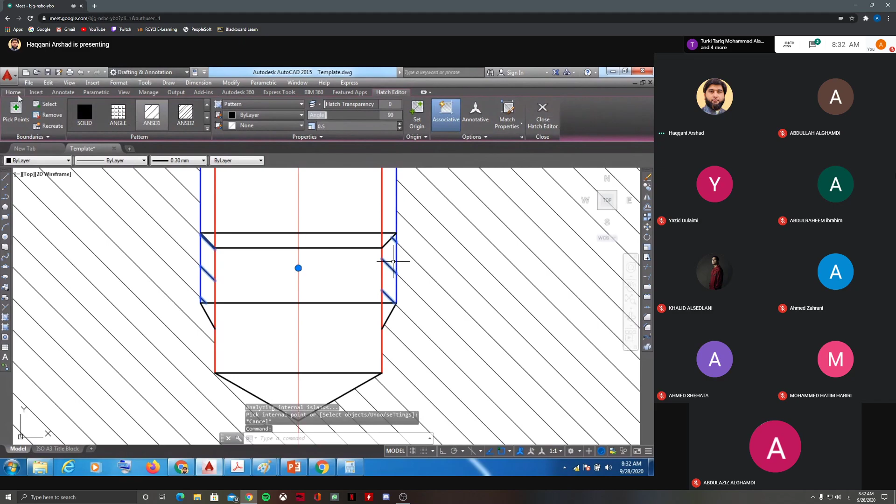Similarly, we'll do hatch here. The area where you see this area, left and right. Go for hatch. See this one and this one. So don't forget to hatch the blind threaded area between capital D and small d. Between this angle and this angle, it will be like this. So that's it. That is the construction of the cap screw and stud with the assembly.

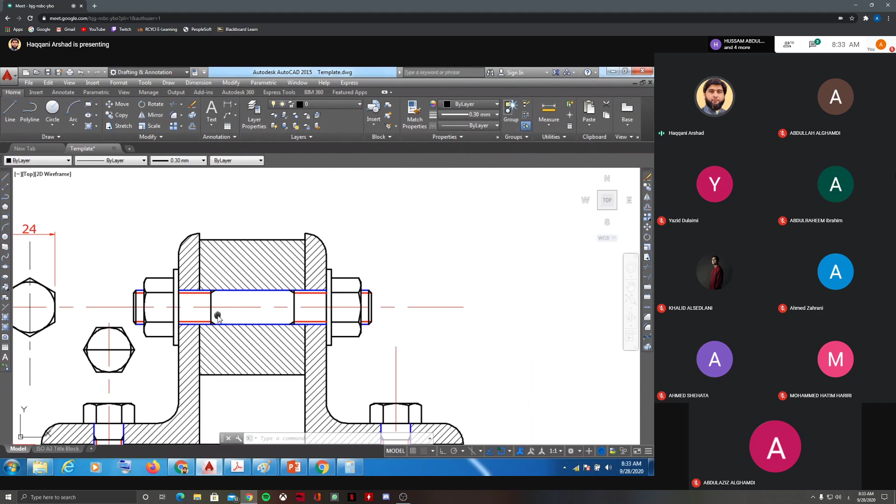Okay, with the assembly. Now the question can be, here in place of stud, I can even fix bolt and nut as well, like bolt and nut we have seen last week. So I can use it here. One side I can fix bolt, the other side I can fix nut. But as per the question, it is stud here. Okay, so you can go through those videos, and you can complete.

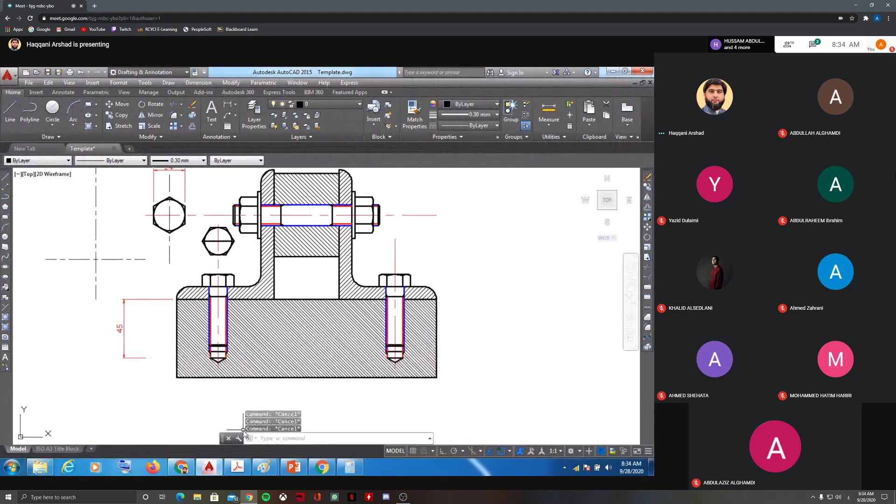So the end figure will be like this with the hatch and all the representation for the washer, the nut, and the cap screw. Are you following or not? Let me just show you one more thing. Okay. Okay.